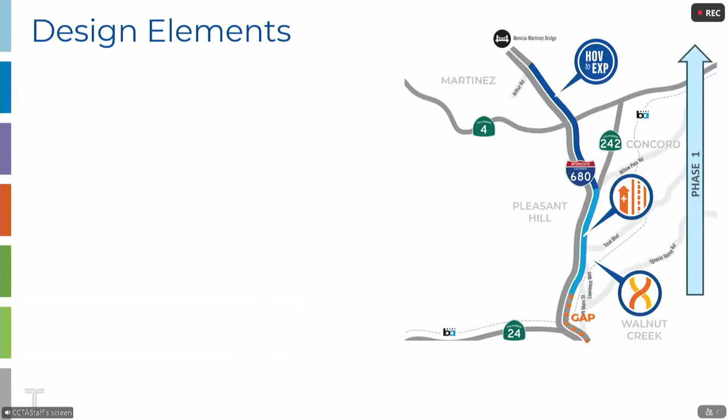So first, a quick overview, and I recognize people have seen these slides a lot. This is really for Commissioner Nowak, so she can get familiar with this project. So this is the project: at the very top we have the HOV occupancy, which we're converting to the express lane. The bottom light blue will be adding a lane for the express lane, and then we have the braided ramp.

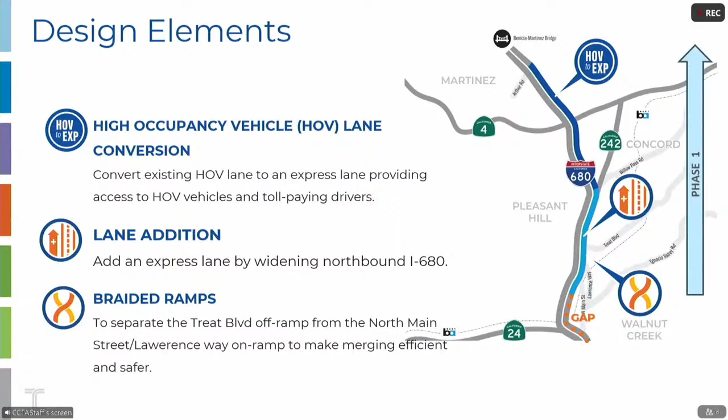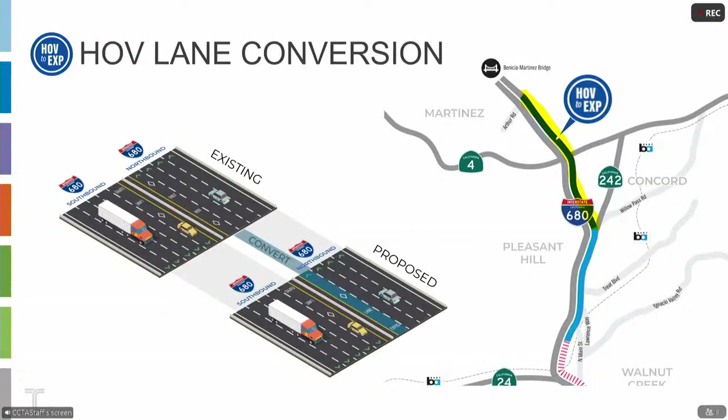To go a little bit more into that highlighted portion—I didn't know this had animations, and I kept it in here because I thought they were super cool. I have my first animation toward the end of this presentation that I'm pretty excited about sharing. But this is converting that HOV lane to an express lane, and lower in that highlighted part, this is adding the lane for the express lane.

I want to highlight some of the major work. Throughout the project we're doing pavement restriping and toll system integration, but the purple lines represent the major work. Between Monument and the 242, there's roadway widening and retaining walls. We'll be reconstructing the sound walls—removing them and placing them back. The most significant element is the entire braided ramp system, which is the roadway widening for the Lawrence Way braided ramp.

We're also doing a bridge widening across the canal. To make this all work, we need embankments with retaining walls and installing a new sound wall. So that bottom purple portion represents the bulk of the impacts and civil work for the project.

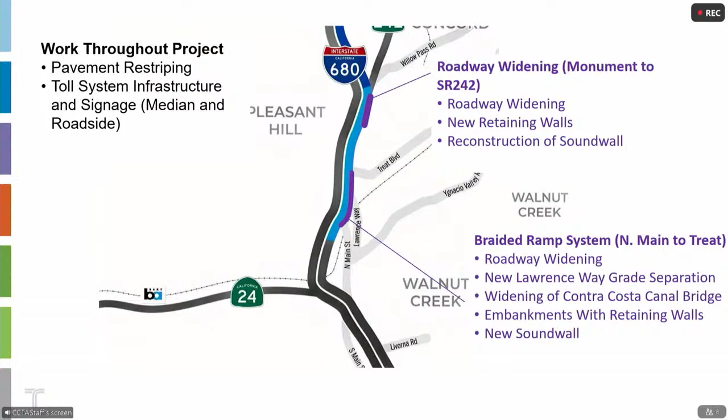Another cool thing—I had to keep this in because I love this animation. This shows the existing braided ramp with its merge and potential weave conflict. With the new proposed design, that will be separated with the braided ramp, creating a much safer on and off ramp.

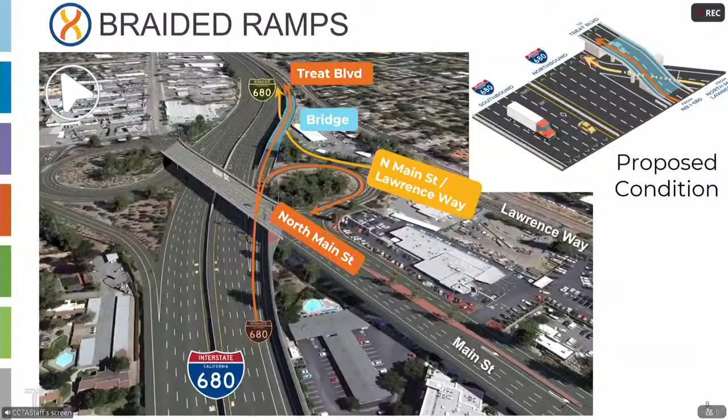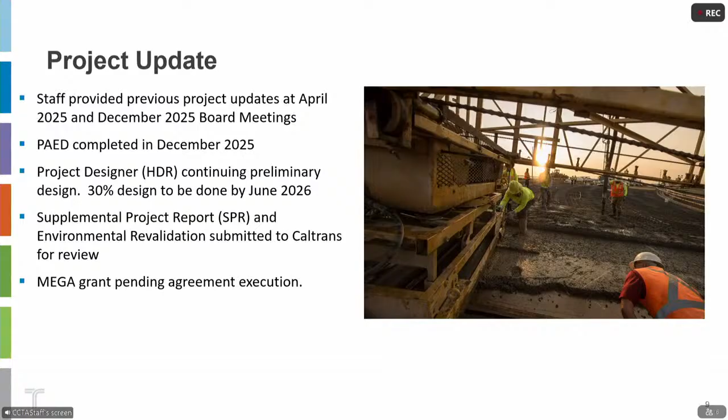Some project updates: we last provided updates at the April 2025 and December 2025 board meetings. We completed the project approval and environmental documents in December 2025. HDR, the designer, continues working toward the 30% design, which will be done in June 2026, just a couple months away. We've recently submitted the supplemental project report and environmental revalidation to Caltrans, because the original reports had Phase 1 and Phase 2 combined, so we had to split them into a clear Phase 1 and Phase 2. The mega grant is pending execution.

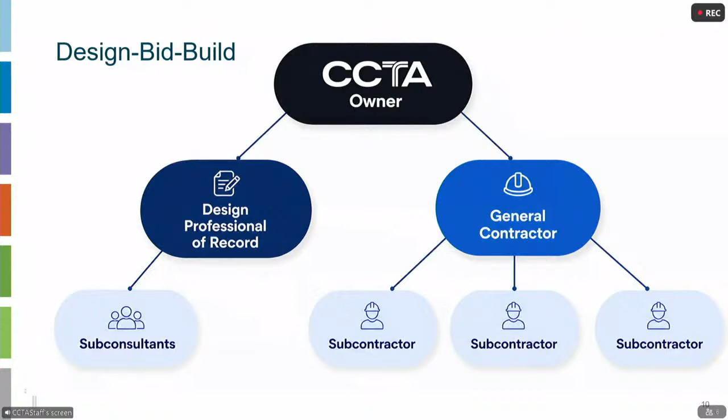I want to go into a little more detail about Progressive Design Build, and to do that I want to highlight Design-Bid-Build, which is our traditional delivery method for the public sector and has been around for decades. At the top you have the owner, and we have two separate contracts—one with the designer and one with the contractor. The designer brings the plans all the way to 100%, then we put that out to bid to contractors, and whoever has the lowest responsible bid wins the project.

One of the challenges with this really revolves around the Spearin Supreme Court case—U.S. versus Spearin, 1918. It was a court case between Spearin Contractors and the U.S. government, during the construction of a dry dock at the Brooklyn Navy Yard.

They had to relocate the sewer, the contractor, and after heavy rains, the sewer system failed, caused a lot of damage, and the U.S. government said it was the contractor's fault. The contractor said it was the designer's fault, and ultimately this Supreme Court case said that the owner guarantees the accuracy of the plans and the specifications.

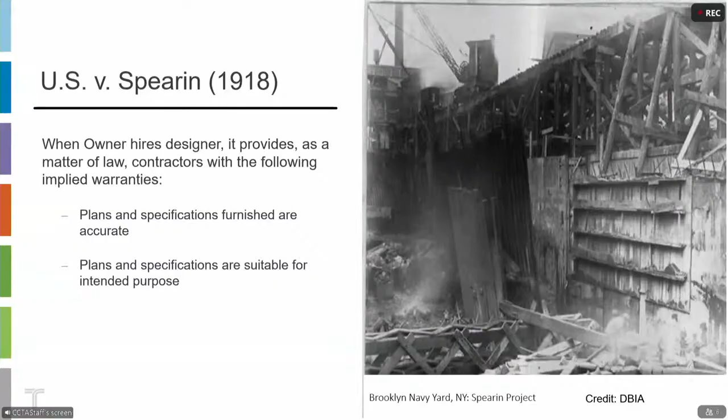So with that, when the contractor follows these plans, any issues or defects are the responsibility of the owner, not the contractor. So the contractor can assume that the plans and specs are error-free. Otherwise, it's the responsibility of the owner.

On the flip side, the designer only has to meet the standard of care. This is the legal benchmark requiring them to perform services with the same skill, diligence, and judgment as an ordinary prudent professional in the same area under similar circumstances. That ends up being subjective, and that's what makes this all very challenging.

You have a general contractor whose liability is based on the Spearin doctrine, saying that errors are the responsibility of the owner. You have the designer whose liability is based off the professional standard of care, which says some errors are acceptable, and the owner ends up being responsible for some of these performance failures.

We end up being the referee for a lot of these disputes. And that's where design bid build, there ends up being this liability gap. It's already challenging enough, but what this really ends up doing is there's a ton of gray areas. There's subjectivity to what is the legal responsibility for this.

So if something goes wrong on a project, the contractor might say they built everything perfectly to the plans and specs. We go to the designer and let them know what happened here, and they'll say they did everything within the standard of care and it's not their responsibility.

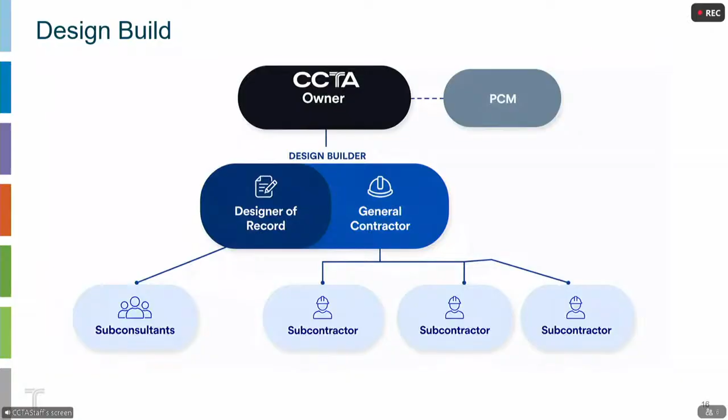The problem with that is there was a lot of risk that wasn't completely figured out. The scope wasn't entirely clear. So that ended up having a lot of issues in itself. The design, I jumped forward a little bit there.

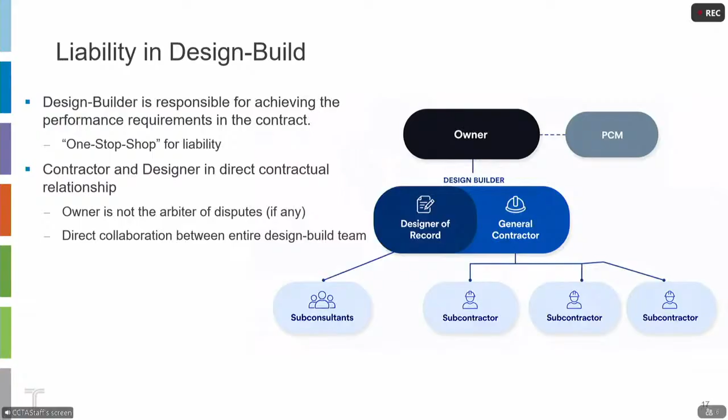The liability in design build ends up being a one-stop shop for the liability. So the owner is no longer the arbiter of the disputes. Now getting back to progressive design build.

In this, we have phase one. The owner directly contracts the design builder. We have our PCM firm over on the side working on the design definition, and we go into phase one.

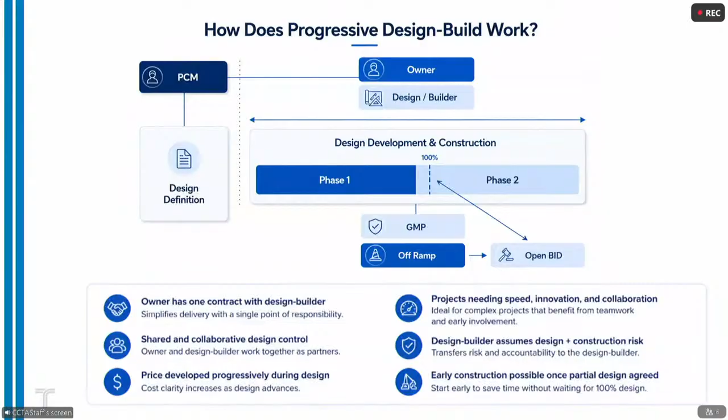Phase one is essentially done on a time and material basis with that design builder, and we work through the risks, the scopes, and assign them in the correct place. Then we work on getting to that GMP, an agreed price that everybody's comfortable with for the risk allocation. If we can't reach that price directly below that, we can off-ramp from the progressive design build team, and we hand it out as a typical design bid build, and we open bids.

So going a little bit more in depth here: number one, the initial phase, the PCM team makes the procurement documents, specifies the project goals, criteria, and works on getting all that information. Then we issue the RFQ in the second phase there.

We issue the RFQ, the RFP, select the design builder, go into phase one, which we showed on the previous slide, and that's working directly with the design builder collaboratively, refining the design, looking at alternatives, developing cost. Number four is working on that GMP decision point. Can we agree on a price or not?

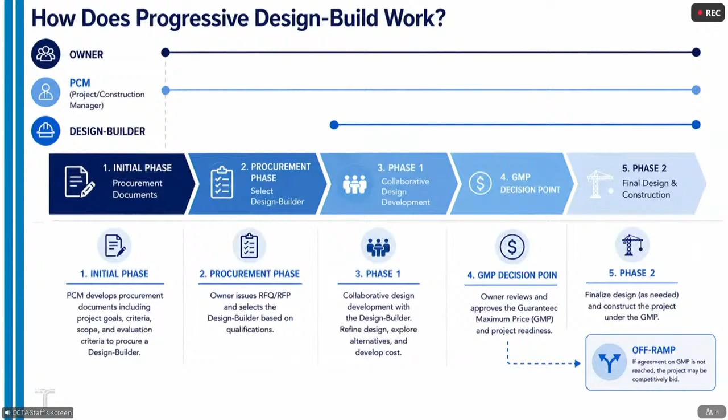Phase two is going into finalizing that design and constructing the project under the GMP. This is the exact same process as CMGC, which we really like. It worked really well in Bollinger. The main difference between progressive design build and CMGC is that one sole contract with the design builder. This process here is the same, working collaboratively through assigning risks and coming up with that GMP.

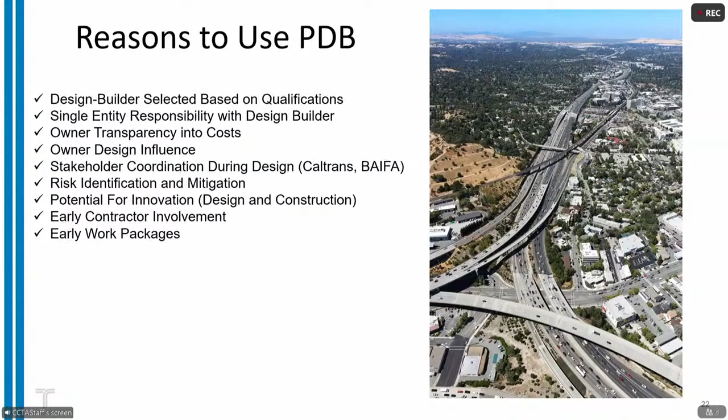Reasons to use progressive design build: first, a big value to us is being able to select the design builder, to select the contractor based off qualifications. We have that single entity responsible with the design builder that I talked about earlier. We get transparency into their costs. We maintain a high level of design influence because it's a collaborative design, especially up to that GMP. There's a lot of flexibility, and we're able to keep stakeholders involved throughout the design. We maintain a risk register and work on risk identification and mitigation. There's potential for innovation both in design and construction, having contractor early involvement, and then the early work packages.

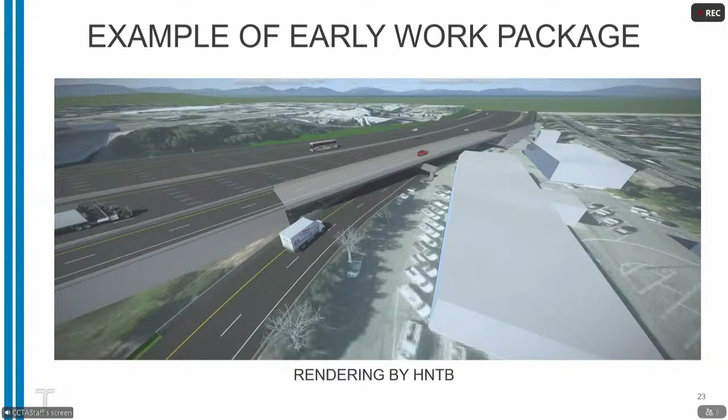To highlight where we can use the early work package, this is a rendering of the braided ramp, done by HNTB at the interview with us. I thought it was really cool. I actually took a Google Earth snapshot, threw it into ChatGPT, and turned this rendering into this. That's actually the roof of the building, the paint job, the striping - all of this is entirely accurate. That took me about one minute to go from this rendering to this rendering using ChatGPT.

I was personally super excited about this, so I was expecting more of an applause. Oh no, you guys shouldn't... you shouldn't, you shouldn't.

So this is a great example of early work packages. The braided ramp is clearly the most complicated part of this project. We have right-of-way, we have utility relocations - there's a lot happening in this area. Early work packages open up a lot of flexibility for us. If we get hung up on a certain part of this project, maybe we go over to the toll lanes and concentrate on that area. Maybe we can have an early work package that lets us start work on this braided ramp that helps us finalize certain other aspects. So we're going to look closely at this and say, can we work here or do we need to split this? But we don't have to wait till everything is 100% finalized everywhere on the project before we start work, which is a gigantic advantage.

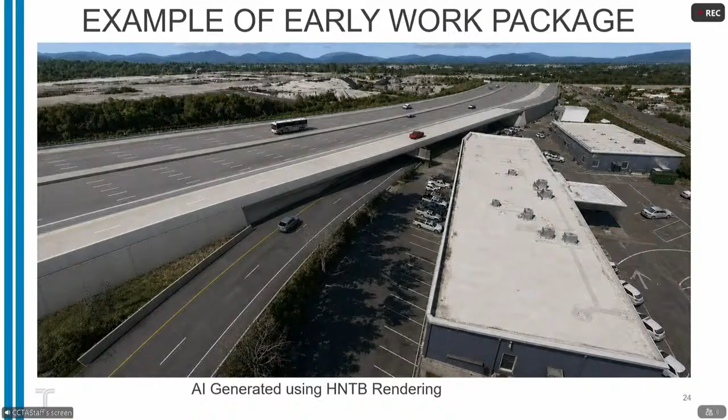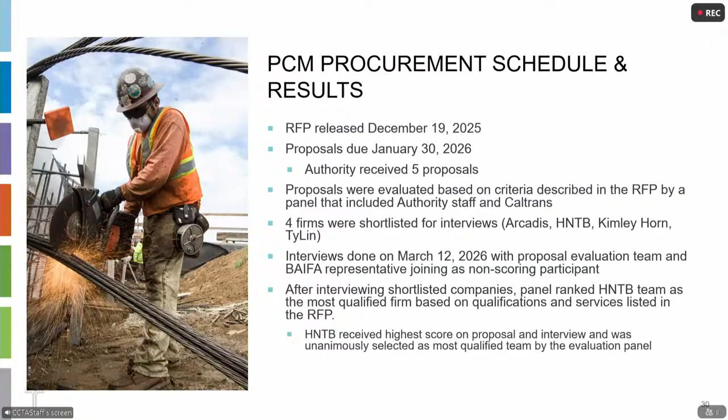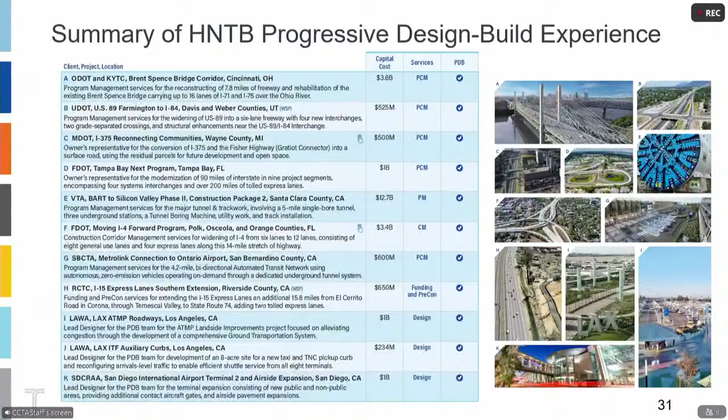PDB has worked in the vertical world for a decade or more, so it's very standard there. But transportation has unique challenges, a unique culture, and HNTB has been developing different ways to make this really fit for transportation. So this is their PDB experience, but we needed a team that was also familiar with CMGC, because that's more common and that's how you establish the guaranteed maximum price. And design build, because during phase 2 it's basically a typical design build, and we needed a company with express lanes experience. So HNTB delivered all of that.

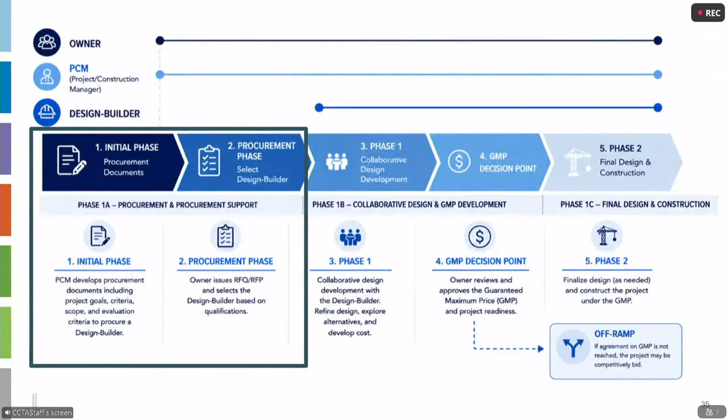Some of the tasks in phase 1A include putting together a project management plan, which will be a nice lift. Work on the agreements with Caltrans and Walnut Creek, stakeholder communication plans, building out a master schedule, reviewing the different California PDB projects and picking up lessons learned and information we can use, and holding industry outreach sessions. The number one lesson learned I hear from everybody on Progressive Design Build is you've got to have the right team, and fortunately we get to pick the team based on qualifications. So that industry outreach is going to be important to make sure we get the best team that fits us best. Also, work on project sequencing and looking at early work packages.

Doing as much with right-of-way and utility relocation as possible, that's one of our big priorities. We talked about the braided ramp - there is some right-of-way acquisition there, some major PG&E relocation. So by the time we have HNTB on board to when we get the Progressive Design Build, we're going to try to move those as much as we can to get a head start on them.

Also working on more detailed cost estimates, kind of a bottom-up cost estimate versus more traditional unit prices, gives us some more accurate numbers. Working on risk review, environmental, PDB cost evaluation process and framework for those documents, PDB RFP, and then getting the PDB on board.

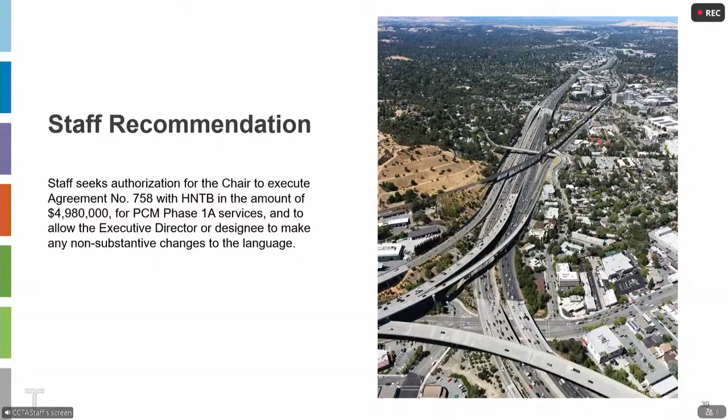Thank you, Brandon. That was really detailed, but really exciting too, to understand how progressive design build works and how we can make it a smooth project. Hopefully we'll keep our fingers crossed. We've been waiting so long to get this project going, so it's great to see that it's definitely moving ahead.

Any questions or comments, Sue? So thank you, and it was actually very informative, all the beginning part, because I don't know any of that stuff, so very helpful - except for that scheme, I have seen that many times.

So HNTB clearly looks like the best qualified for this. Was there a wide range? Was there bids for dollar amounts? Was there a wide range of that, or? So the way that the professional services procurement works, we have to pick off of qualifications only. And then after they're selected, we open up their prices, and we're not even allowed to see anybody else's prices.

Okay, good to know. Well, good question, answers that question. Okay, Newell? Brandon, I agree with you, great presentation.

Progressive design build, they do two things, most importantly reduces the cost risk between design and construction, no question. What it doesn't do, particularly in this case, when you have an area you're going to build in that has a lot of existing infrastructure built a long time ago, 50, 60 years ago, lack of documentation and things like that, in an incredibly heavily traveled area - high risk on the unknowns.

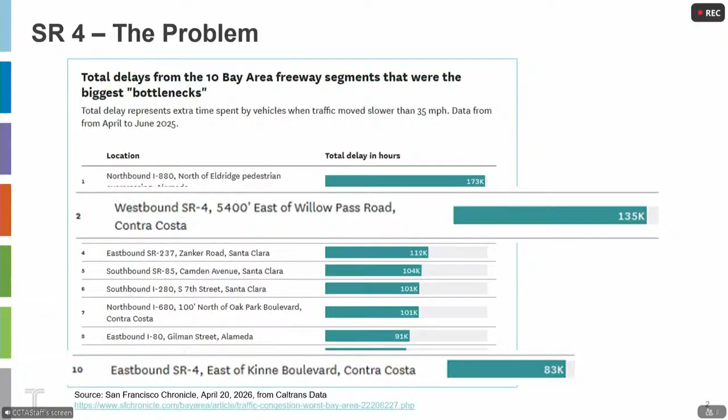So the SR4 Operational Improvement Project is a key project in the strategic plan. It runs from 680 to Bailey Road in both directions of Highway 4. CCTA completed a planning document called the Project Initiation Document, or PID, in 2017. That document includes several alternatives, and packages of improvements in both directions, eastbound and westbound, including variations like extension of a lane, a new aux lane, or converting an aux lane to a general purpose lane. The packaging of improvements was done intentionally so we could deliver these projects as standalone projects with individual benefits, allowing us to move forward with small pieces as funding becomes available.

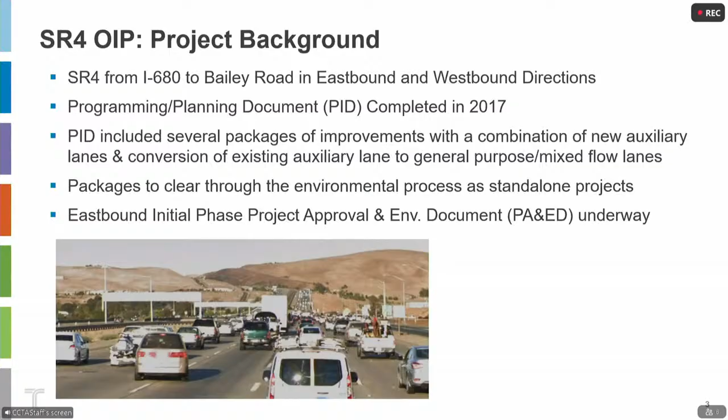The eastbound has started the next phase of work, which is project approval and environmental document. For the initial phase, a few years ago, we started that earlier in April. The reason for the pause was COVID, we were unsure about our funding situation. It is funded by Measure J, and also the SB 743 implementation, which was really uncertain 5 to 6 years ago.

So this morning, we're focusing on the OIP project, westbound initial phase. It's from Willow Pass Road to Port Chicago in Concord. We already said that the AM peak congestion is heavy in this area.

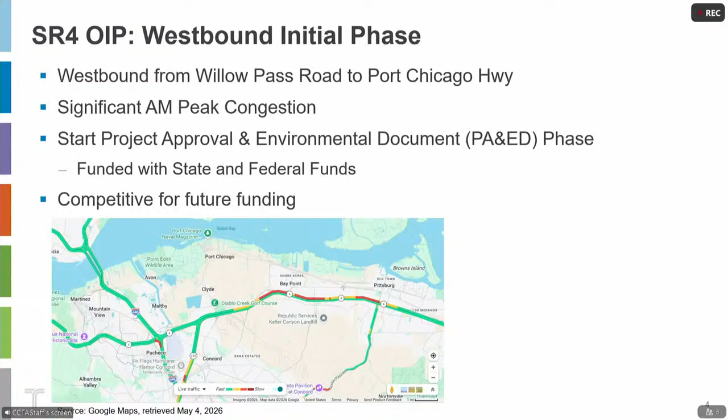We are ready to start project approval environmental document phase, or PA&ED, for this initial phase. We secured state funding and federal funds for this. Completing PA&ED is essential to compete for design and construction dollars, making this project more competitive for future funding.

This is a map showing the scope of work for this initial phase in the westbound direction. The yellow is the completed Phase 3 under the 680/4 project, which at the time was not completed, but now it is. The packages we'll be focusing on for westbound Phase 1 are the light blue and brown pieces on this map.

Basically, a new lane or extension compared to the existing condition between the Willow Pass off-ramp and the Port Chicago off-ramp, creating an extra lane at the Port Chicago exit. We're also modifying the current mandatory exit on 242 to a split optional lane, allowing 3 lanes to go to the 242 exit and 3 lanes to continue on westbound 4.

The scope of work under the PA&ED is to conduct preliminary design off of the high-level design work done during PID, the planning documents, and to conduct the required technical studies under environmental review. This will include SB 743 implementation because of the small lane adds. Because of the VMT impacts, the CEQA document will be elevated to an EIR.

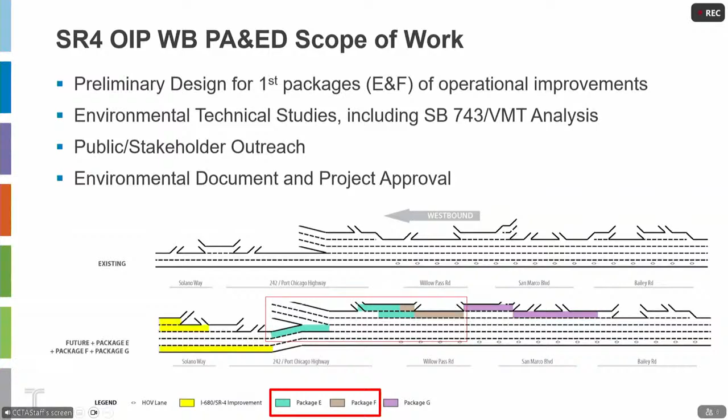Staff has completed the procurement for a consultant firm. We released the RFP back in November and received 2 proposals. The evaluation panel included CCTA and Caltrans staff, and interviews were conducted early in the year. HDR was ranked as the number 1 firm.

So staff seeks approval or authorization for the chair to execute Agreement 744 with HDR upon completion of the federal pre-award audit, which has actually been completed recently. We're just waiting for the funding application process, in an amount not to exceed $3,999,732 for the environmental and engineering services to complete PA&ED, and also to allow the executive director or designee to make any non-substantive changes to the agreement language.

With that, happy to take any questions that you may have.

Is there anyone here in the audience who wishes to speak on this item? And Emily, anyone online? No public comment, written or virtual.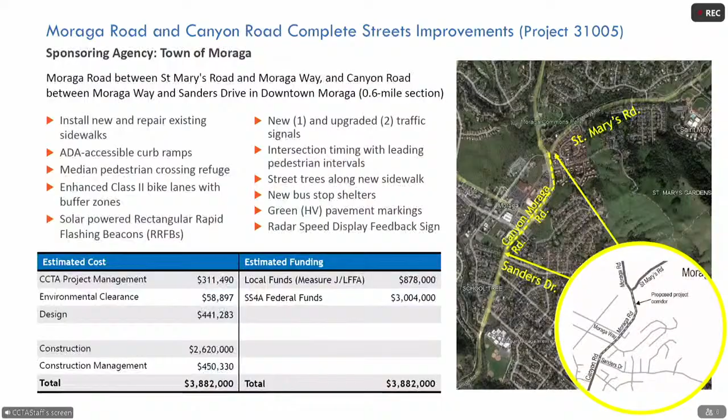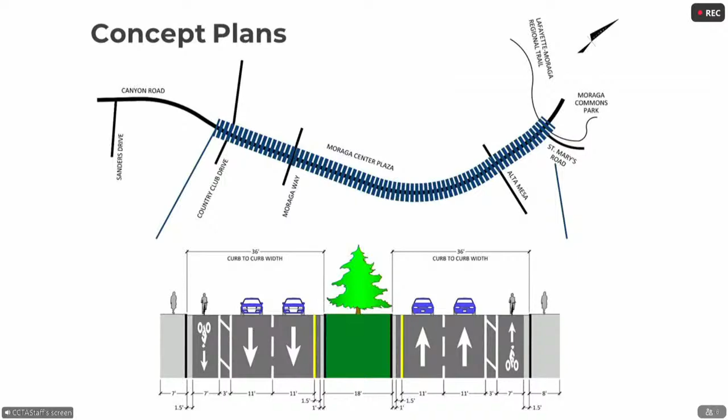Here's a look at the cross section and the segments. Again, it's a 4-lane cross section, and one of the main features of the project is to provide those Class 2B buffered bike lanes with high visibility markings along the corridor.

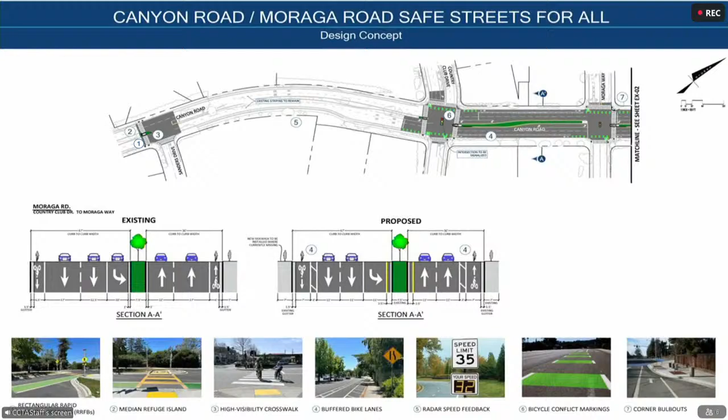This is a look at all the different features. From the south end of the project at Sanders, this is where the RRFB system is going. Progressing to the north, the Country Club Canyon intersection will get a brand new traffic signal. Further north, Moraga Way will get some signal improvements to the existing signal, and further north at St. Mary's, there will also be signal improvements.

At the north end of the project, there are some lane configuration changes. As mentioned, it's a 4-lane cross section and the roadway will stay that way, although as it transitions to St. Mary's, it goes down to one lane. To accommodate the bicycle lanes and buffers, and to keep some of the designated turn lanes, it'll transition down to one lane a little bit in advance of the Alta Mesa intersection. In the upper right-hand corner, that's where the Lafayette Moraga Trail intersects the road, and that's where the new sidewalk segment and street trees will be going in.

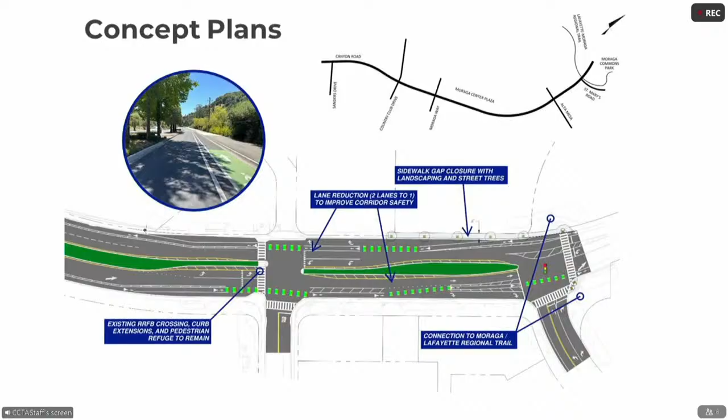It's a nice exhibit of the cross section when it will be done, as far as the buffered bike lanes along the segment proper.

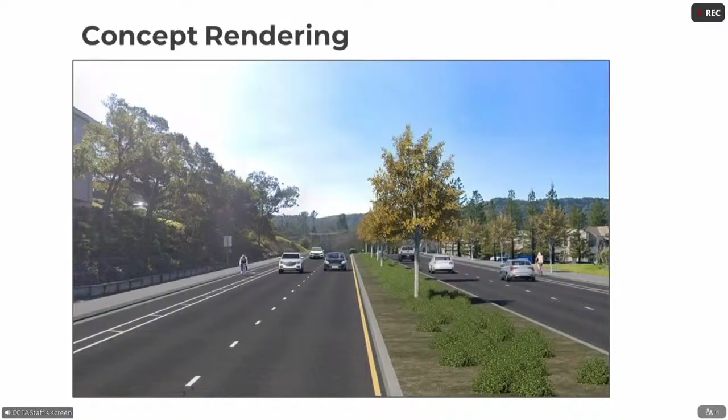We've done considerable outreach over the last year and a half. The Moraga Town Council has seen the preliminary design and conceptual designs, and has approved those. We're pretty close to 100% completion of the plans - 95% has been completed, and we feel confident we're very close to completing 100%. NEPA and right-of-way is in progress, and we expect that to be approved in May and go to construction in July. Advertisement would be in May or June of this year.

A couple of critical path items and challenges with the project: the town is doing a pavement rehabilitation project, which they're actually integrating into this project, so they'll really be handling most of the paving along the corridor. We will do some spot paving, but their pavement project will sort of be combined with this project. It'll still be separate, but about midway through the project, after we get all the concrete work done, the town will come in, do the paving, and then we'll come back in and finish with the striping and the signal improvements.

Lastly, coordination with the Lamorinda Smart Signal System project, which you heard about last month - we're going out to bid with that project. There is new equipment being installed at 2 of these intersections that are getting the improvement, so we'll need to make sure we coordinate with that as well.

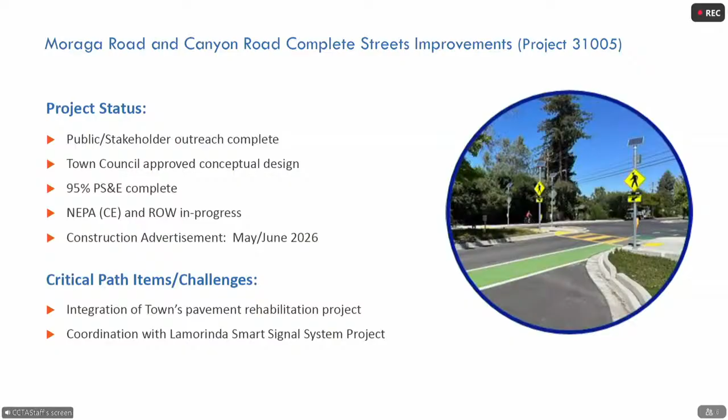So here's another look at the schedule. Project completion is estimated for March of 2027. So with that, staff is seeking approval of Resolution 2615P. It'll authorize the Executive Director to approve the project design in accordance with Government Code Section 830.6 to preserve design immunity, publicly advertise the construction contract at the Executive Director designee's discretion upon successful obligation of FHWA authorization to proceed, approve changes and issue addenda to the bidding documents during the advertisement period, and then lastly, publicly open all bids received. So with that, happy to answer any questions.

Thank you, Andy. Any questions here? Darlene? Yeah, I'm sorry. So Andy and maybe Brandon, this will wake him up over there now that he's so proud of himself.

So which entity is doing the construction management for this? So we actually just released a mini RFP for the Moraga Complete Streets and the Lamorinda Smart Signals last week. Proposals are due May 20th. So we haven't selected it yet. We just had a pre-proposal meeting yesterday, but we anticipate there's a good chance one firm will be able to do both in similar areas. So not sure yet, but we'll know in a few weeks. This is from your on-call contracts, right? From the on-call, yep.